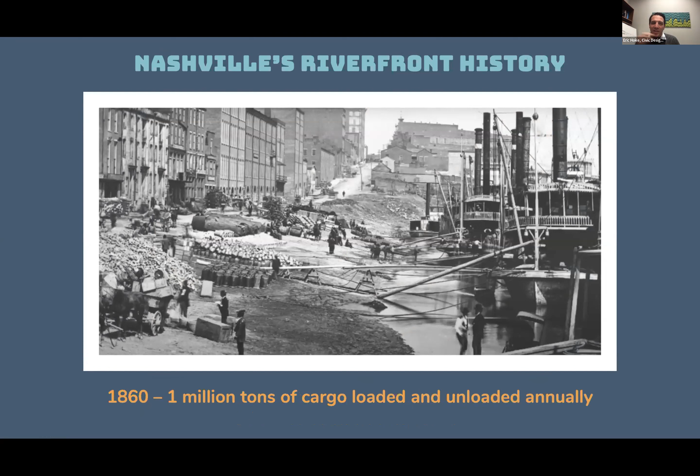By 1860, there was over 1 million tons of cargo loaded onto First Avenue there. This was a sign of utilizing the river, the active frontage, and the river was a really important part to the formation of Nashville as we know it.

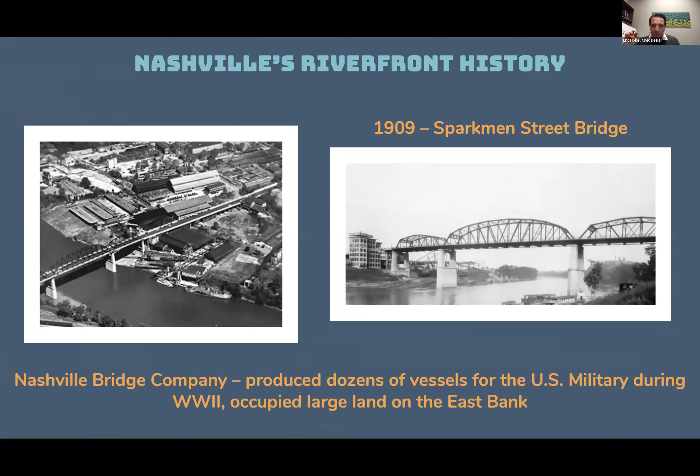Fast forward a few years to 1909, the Sparkman Street Bridge was formed, so it started to connect the east and west side. And the shipping industry really took over a lot of the East Bank there, where that started.

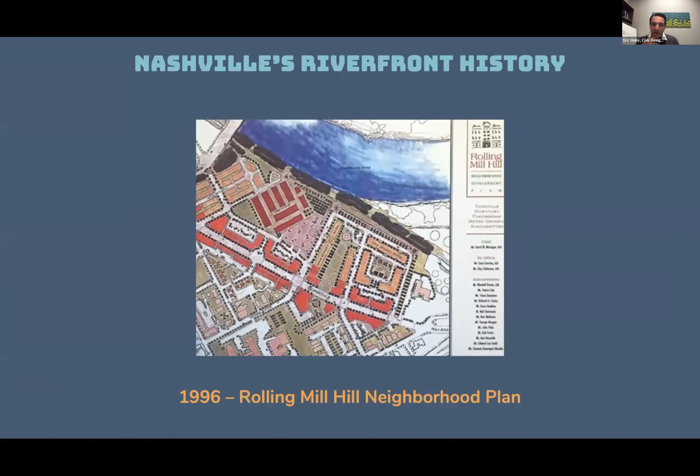Then fast forward again many years to 1996, when the Rolling Mill Hill neighborhood plan was formed, beginning to talk about residences in more downtown areas, especially as it relates to the Wharf Park area, just slightly north up the river from the Wharf Park site. This began to be formed as a neighborhood.

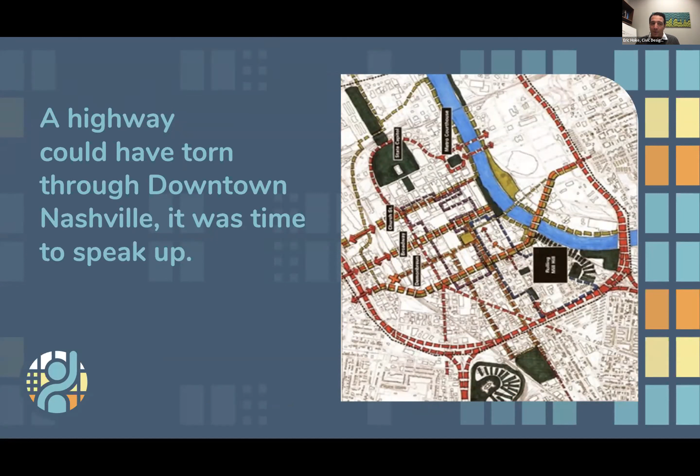So then in the 90s, there was a proposal to build an interstate through downtown Nashville, very close to the site where Wharf Park is, but basically where Korean Veterans Boulevard is now. This group, the Urban Design Forum, met regularly to discuss civic issues in Nashville.

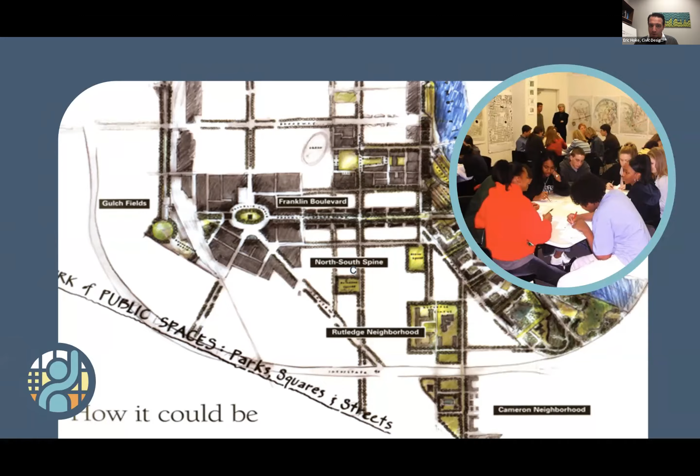They saw this as a threat to the development of the city as a whole, so they proposed an alternative vision known as the Franklin Boulevard, a more human scale design than an interstate, to suggest what the future of that corridor should look like. That effort went on to form the Civic Design Center.

From that moment, the Urban Design Forum decided we needed a more regular group, so they formed a 501c3 known as the Nashville Civic Design Center. The first project they took on was the Plan of Nashville, a document that still guides the work we do as an organization.

There are two principles I'll call out as part of that update: prioritize design that alleviates impact on the environment's natural resources, and expand the parks and greenway system.

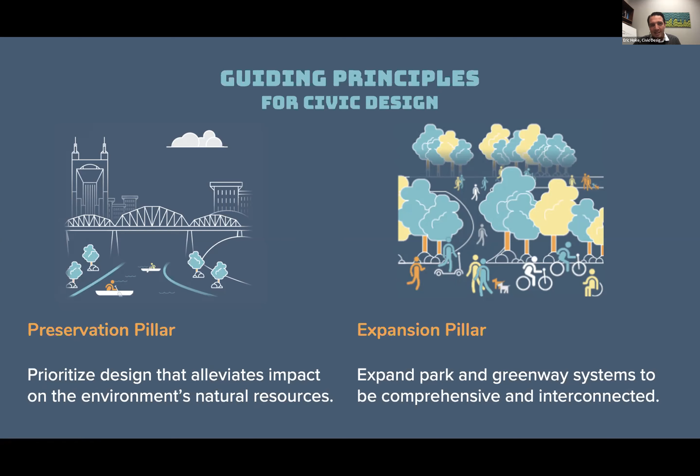I think these two principles are something we will think about as the Civic Design Center as we go forward. I'd really encourage you to go to our website and learn more about the principles.

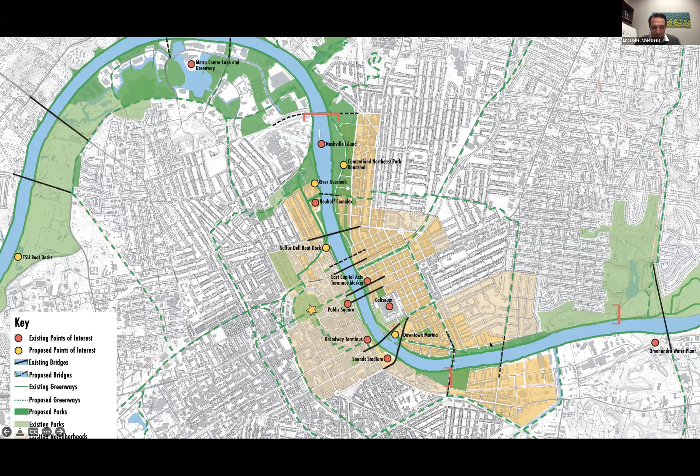This is an image from the Plan of Nashville, and it shows you again the site where Wharf Park is, at the bottom of the screen. That was called for even back in the early 2000s when the Plan of Nashville was being written.

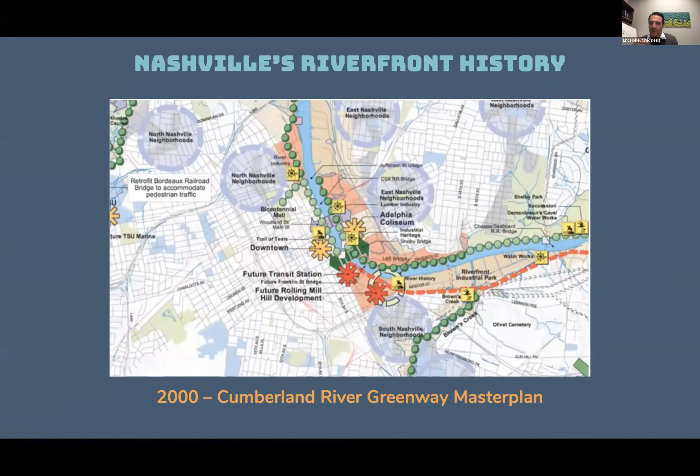Then in 1999, the Titans Stadium opens. In 2000, the Cumberland River Greenway Master Plan is published, again trying to make Nashville's connectivity to the riverfront a priority for the work we're doing. In 2007, the Hargreaves Riverfront Master Plan was completed.

Then in 2010, we had a very devastating flood downtown, which made us consider a lot of the issues that the river experiences.

Then in 2012, Cumberland Park on the East Bank, just across from our site, the Wharf Park site, was completed.

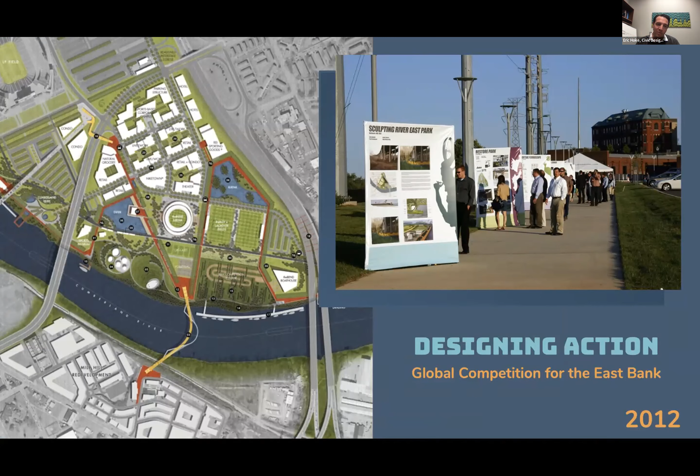Meanwhile, the Civic Design Center launched a global design competition called Designing Action, where we asked design teams from all around the world to weigh in on ideas for the East Bank in particular. The winning design showed a pretty interesting connection to the Wharf Park and Rolling Mill Hill area.

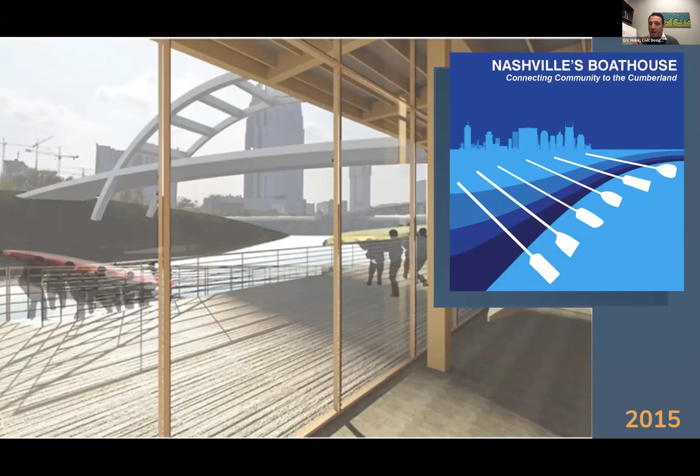Also in 2015, we worked with the University of Tennessee College of Architecture to envision boathouse ideas along the riverfront, which led to a design by Hastings Architecture that I think may be incorporated into the Wharf Park site. So pretty exciting stuff there.

Then in 2015, the Ascend opened, and in 2016 we launched another publication called Shaping Healthy Communities, which proposed a vision for the Blue Way, connecting several important sites along the Cumberland River, including Wharf Park.

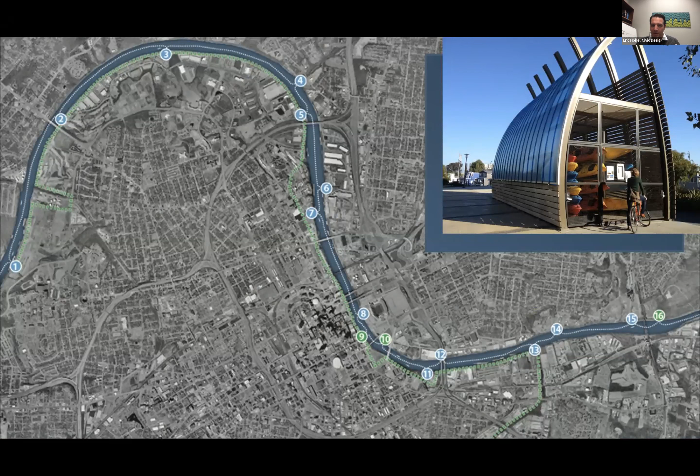We're currently working on a publication called Activating Waterways that will propose design interventions for some strategic locations along the river. That publication will be coming soon from the Civic Design Center.

I know that was a lot I just threw at you really quickly, but that's just a look at what we're working on now.

At this point, I want to turn it over to Tim from Parks to introduce this project. So take it away, Tim.

Thanks, Eric. I felt like my career, and probably a lot of the people on this call, our careers have just flashed before our very eyes with that quick history.

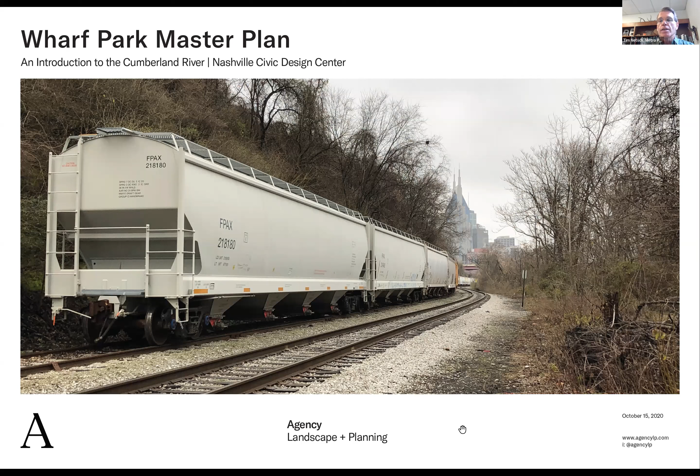As probably a lot of people on this call are keenly aware, there is an unprecedented amount of planning on and near the Cumberland River in the downtown corridor these days, and we're really in a period of transformative change. So today, we are thrilled to share with you some information about one such site, Wharf Park, and we hope it'll be entertaining, informative, and inspiring.

In a moment, I'm going to introduce you to Gina from the Agency Landscape and Planning team. About a year ago, the Metro Parks Department secured the services of Agency, out of Cambridge, Massachusetts, and their stellar team of planners to help us establish a vision and a future for the Wharf Park site. Gina Ford, Susanna Ross, and Kimberly Ware are here today, and in a moment I'll turn it over to them.

I have a tendency to feel like whatever park project I happen to be working on at any given moment is the coolest and the best. But it's totally true about Wharf Park. This is the coolest and the best project.

This aerial view gives you a little bit of site orientation as to where our site is. We've got about 25 acres with incredible character. So many of these other potential park redevelopment sites on the Cumberland River downtown are a little bit of a blank slate. And that's not true at Wharf Park. We've got River Bluff, we've got a quarry, we've got industrial relics, we've got a riparian forest. There's a ton of character, and that presents a ton of opportunities and a ton of challenges.

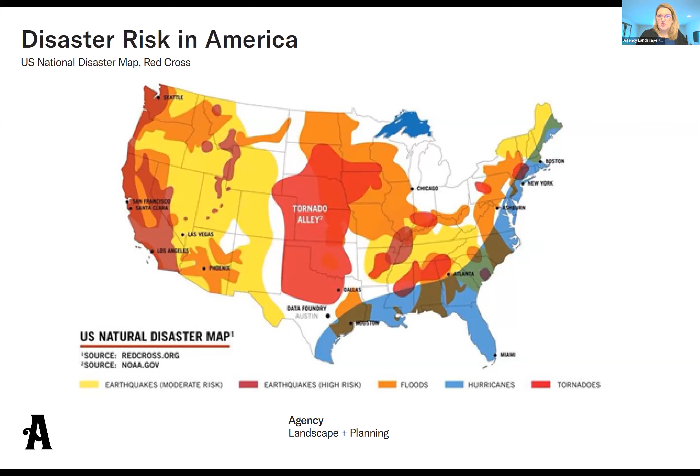So as we look at Tennessee, we know that's the case, that it must feel in many ways that you're accosted on all fronts. Thinking about how to help communities adapt to this incredibly disruptive environmental change is a big part of the way we think about the work. We knew going into this about the 2010 floods. I remember being here and interviewing for the flood resilience recovery planning after those events, and really being stunned at the amount of destruction of that flood, but also a lot of good planning that's gone into the works to make Nashville more resilient in the future.

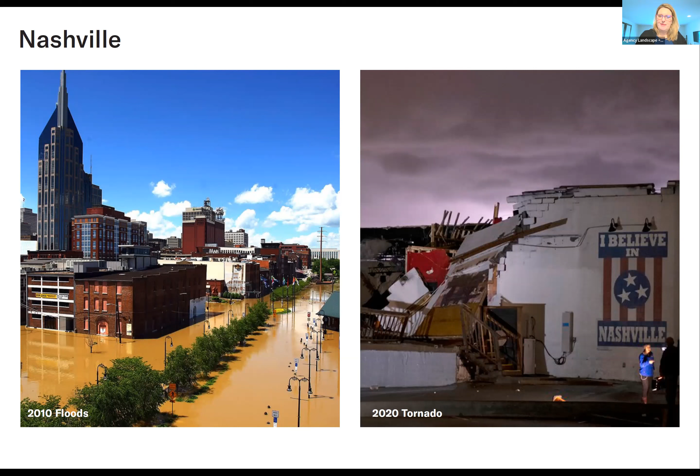And we had just kicked off Wharf Park, the Wharf Park master plan, when both the pandemic and the 2020 tornado hit Nashville. So the idea that these disruptive events are happening more frequently, and that they knock us down, figuring out how we can help communities brush off quicker and bounce back and be more resilient to them is critical.

So I wanted to share one example of this, of flood resilience, and this is at the Chicago Riverwalk, where I had the great pleasure of being the lead designer for the work on the Chicago River alongside Carol Ross Barney of Ross Barney Architects and myself as the design principal for Sasaki.

The great joy of this work was really 6 blocks of the main branch of the Chicago River. The idea was threading together these 6 blocks, linking together spaces that had been disconnected, creating a continuous public realm, and really thinking about how to reintroduce people to the Chicago River, which for many years they'd been held up and away from because of flood concerns and water quality issues.

Our scheme really centered on this idea that each block of this experience could be diverse, that it could offer diverse kinds of programs, and that each block could really be inspired by a specific water experience: the marina, the cove, the river theater, the water plaza, and the jetty.

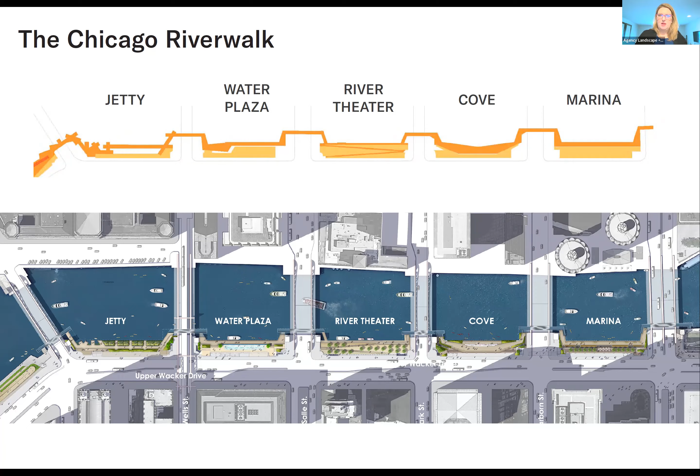This was the space we were given when we began the work in 2009, which, as you can see, was sad and derelict and non-continuous, even though Burnham famously had imagined this kind of continuous waterfront experience. The reality was very bleak.

Through many years of hard work and some great government funding, federal funding, we were able to transform that space into this continuous public realm with different kinds of spaces along it.

In this case, a kind of dining terrace that allows for people and boats to interact in a really direct way. And importantly, before, people were held up and above and away from the water, and a lot of our work was getting people down close to the water and really welcoming that exchange with the water sheet.

These different experiences, from those of dining to those of human-powered craft, which are welcome to the cove, to the casual connectivity moments of people strolling along the waterfront, are all part of this dynamic, multi-roomed experience of the river.

Really important to this conversation, welcoming people to get closer to the river meant also welcoming the flood dynamic into those spaces. So every single one of the spaces along the Chicago Riverwalk is designed to receive those flood waters, to be dynamic.

In this case, the jetty was a whole room dedicated to floating wetlands and fish habitat. Those floating wetlands actually sit on the water surface and rise and fall with the dynamics of the Chicago River. It's a way of registering to the community those dynamics, as well as making it a beautiful experience.

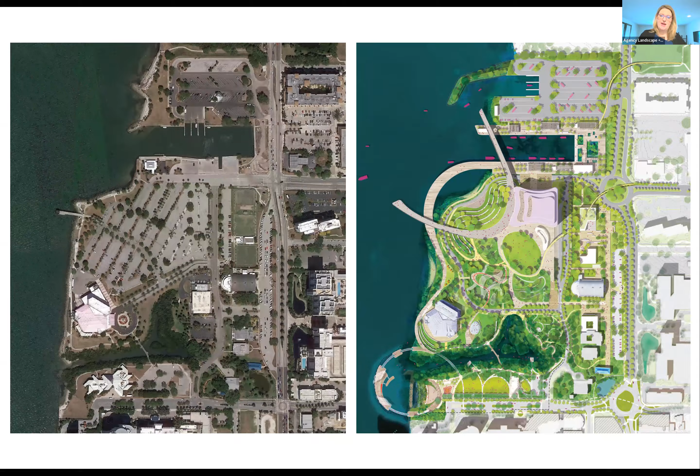We're really happy to say that even though that master plan wrapped up in 2018, we're now in the process of realizing the first 2 phases of construction. Phase 1 is under construction - that's this view you see here, a 10-acre community park on the south side of the site. We're mobilized to deliver the rest of the majority of the site over the next couple of years.

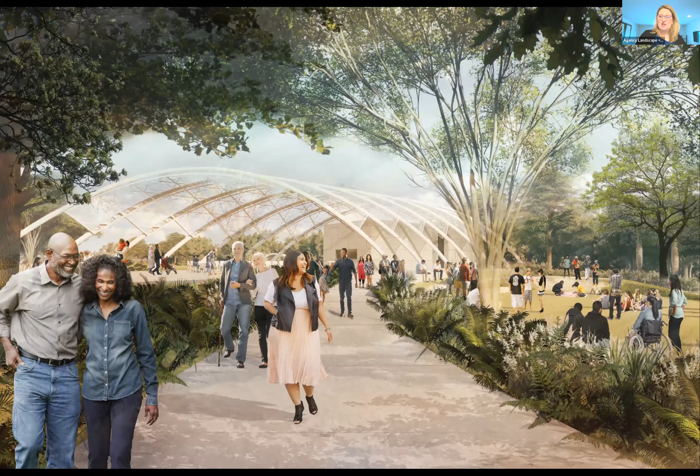So master plans can lead to quick action if there's momentum and enthusiasm, which there was here. Again, it was really about having that great public access on the waterfront, but also making sure it's amenitized to give people reasons to come back again and again, whether through cafe and food offerings or performance and programming, as this image starts to suggest.

We know, and Eric just did a brilliant job of the much bigger overview of the parks, but we know that we're working alongside and have had lots of conversation with the work on the East Bank. So understanding that Nashville's change on the riverfront is much bigger than what's just happening at Wharf Park. There's so much happening, and we know that change is going to be felt soon, and it's going to be a really interesting time for the city.

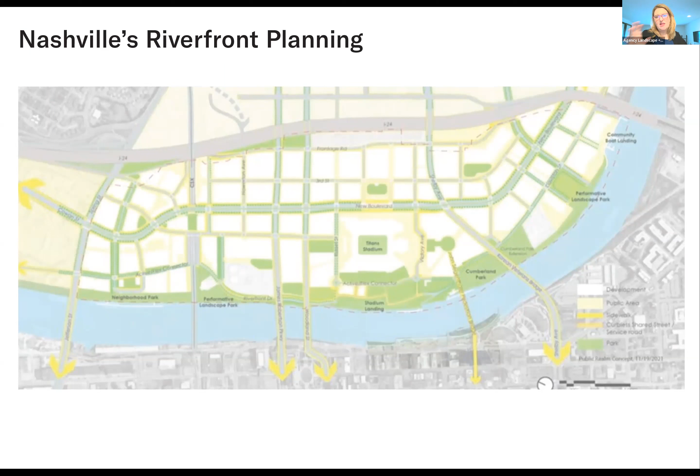So thinking about how to make sure all of these plans are coordinated and that all of these different efforts lead to that diversity of experience, and really making sure those spaces meet the needs of the community, was also a critical issue at a recent plan we conducted called the White River Vision Plan. This was a strategic, higher level plan looking at 58 miles of the White River in Indianapolis and Hamilton County, a very urban county and a very rural county that came together around the resource of the White River. There, again, 13,000 voices participated.

It was an intense process of getting out and making sure we listened to the bluest of the blue voices and the reddest of the red voices, and came to a vision that everyone could agree on or could live with and be happy with. So in this instance, 58 miles, as you think about your whole riverfront, allowed for there to be those distinctly urban experiences of highly developed recreational spaces and connectivity, as is envisioned here with the downtown Indianapolis view.

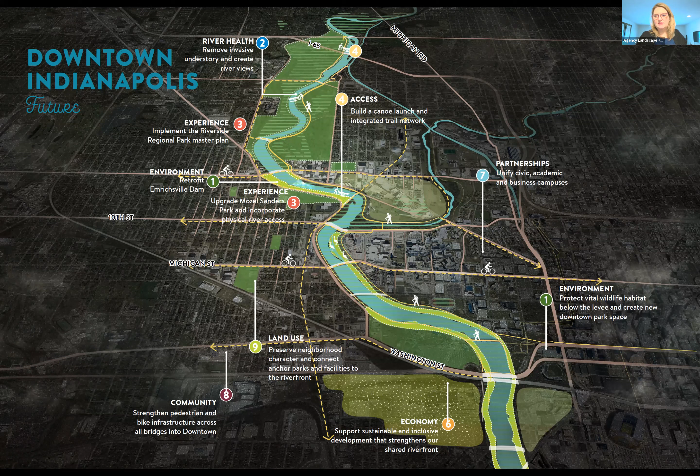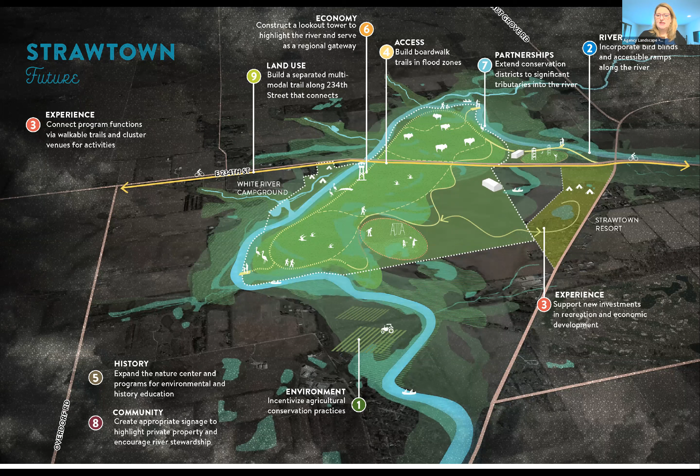So you see a real emphasis on connectivity, greenways, activation and experience, and also partnerships in these more urban reaches, really imagining places that could be community hubs, bringing people together by the river's edge and really celebrating the life on the water's edge, as we call it, but also making sure there were really distinct places for environmental quiet and intimacy, such as at this northern reach called Strawtown Koteewi, which was an existing park we really wanted to see enhanced to include more activation and association with the river.

And so in this instance, it was really about those quieter uses, those kind of recreational uses that were a little bit more intimate in scale, and a whole series of environmental restoration to make it a healthy and green environment. So with that, I'm going to now pivot to the team and talk more specifically about the work underway at Wharf Park, but just wanted to give you the context of the work we've done in the past and some of the issues we think about.

And that is the experience that we have brought to bear as we have had the great pleasure of working on Wharf Park. I'll turn it over now to Susanna.

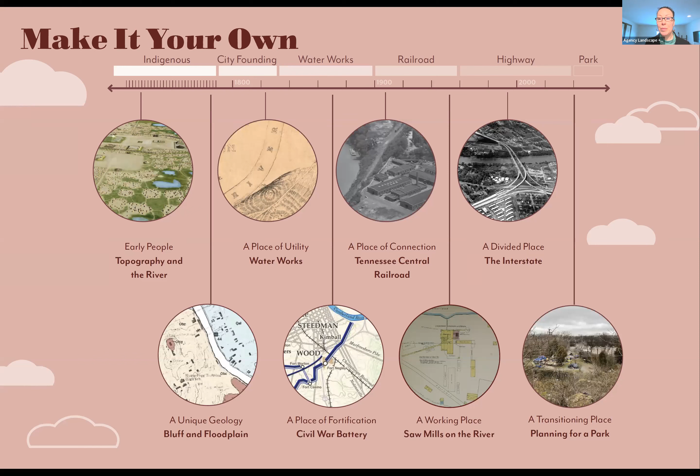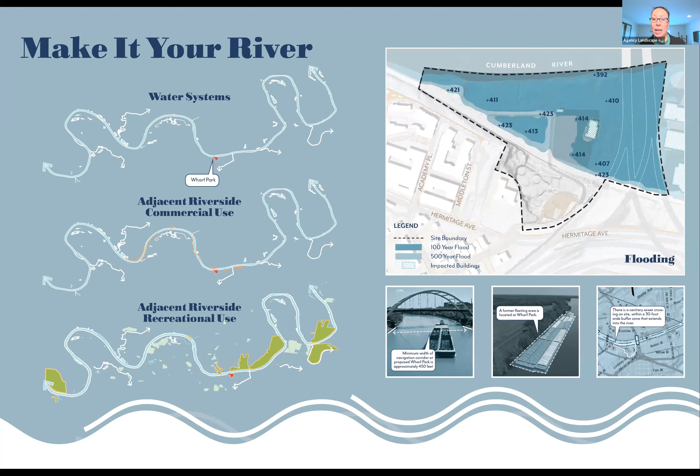It's also, as the map on the upper right shows, a place that floods. It's a floodplain. We know at the 100-year and 500-year flood elevations that we can expect to see flooding, so our design will have to factor in what can withstand inundation and what can't.

Next, looking at parks and where this fits within the context, we expect this will be a neighborhood park. The neighborhoods we are serving, we expect, will be from across Nashville, but particularly those closest as the crow flies. Rolling Mill Hill sits right at the top of that bluff looking down at the park.

Napier-Sudekum is separated by the highway, but we've got a pedestrian overpass that we think can provide a great link to this park and make it a real resource for the Napier-Sudekum community that they don't currently have. We want to enhance that connection, figure out how to make it better and a more practical place for people to go on a regular basis.

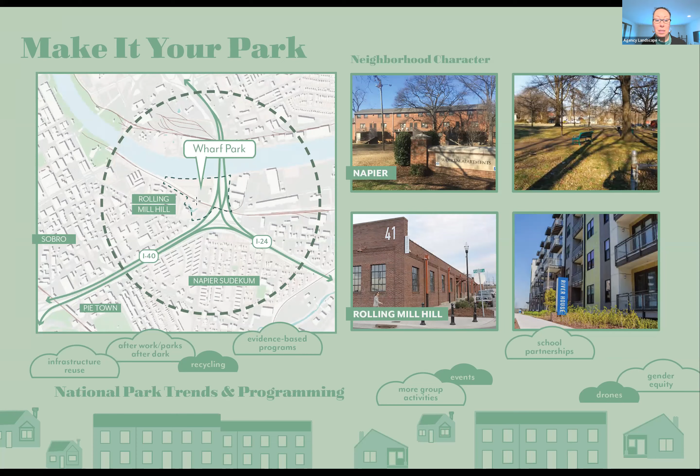Then the Greenway lens: there's an amazing network of both existing and planned connections within the greater Nashville Greenway, and it's lovely that Wharf Park falls smack in the middle of all of it. While at the moment this site is fairly inaccessible, we know going forward people will want to get there by foot, bike, bus, and car.

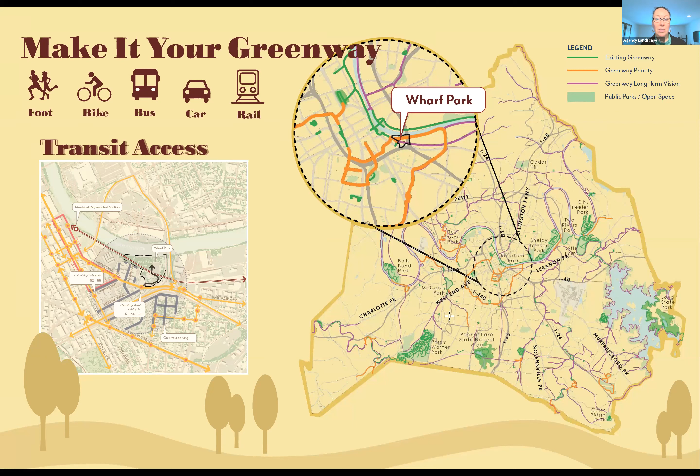So our plan is thinking through that in a lot of different ways. You'll see many different ways of looping into the site as we get to the schemes we're going to show you today. With that, I'm pleased to hand it over to Kimberly, who will talk about the outreach we've done to date and what we heard that helped shape our options.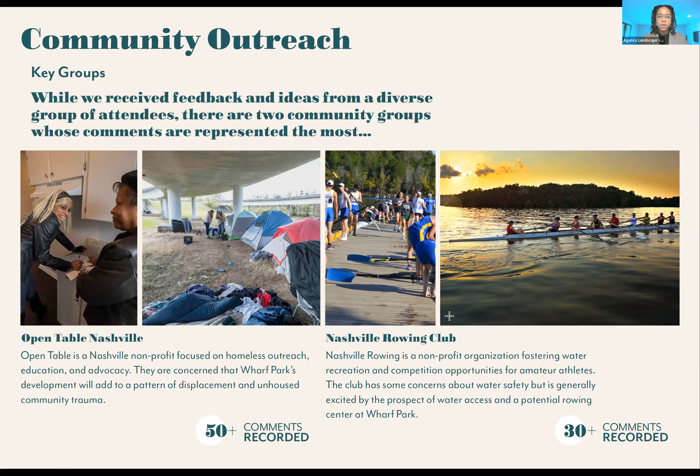So those were the two main constituents that we saw at the last meeting, and we were seeing a little bit more of that this week. We just had our first meeting showing the design options yesterday, and both of these communities were present as well, but we welcome the whole community to give their feedback.

So just a summary of what we talked about. We set up the engagement stations in the same way that Susanna was just mentioning, with the identity, river, and greenway, and getting people's comments based on those key areas.

In terms of what people wanted to see for the identity of the park, it really centered around having a space for youth recreation. We know we want this to be a neighborhood park where kids can go after school, and have a place to spend their time with access to outdoor, open space and greenery, a place to go outside of their home. So future access from those neighborhoods close by Napier, and concerns about the social welfare of the currently unhoused people on site, is a main concern with the identity of the park in the future.

In terms of river access, we had a lot of rowers come out, so they were definitely interested in having dedicated space for human-powered watercraft, paddle watercraft, etc. We know we want a diversity of water uses there, including kayaks and paddle boards, as well as rowing. Water safety, considering this is also a commercial waterfront, was important to people, and passive river viewing as well, not necessarily always getting into the water, but having a space to just take in the vistas and potentially look towards downtown from this site.

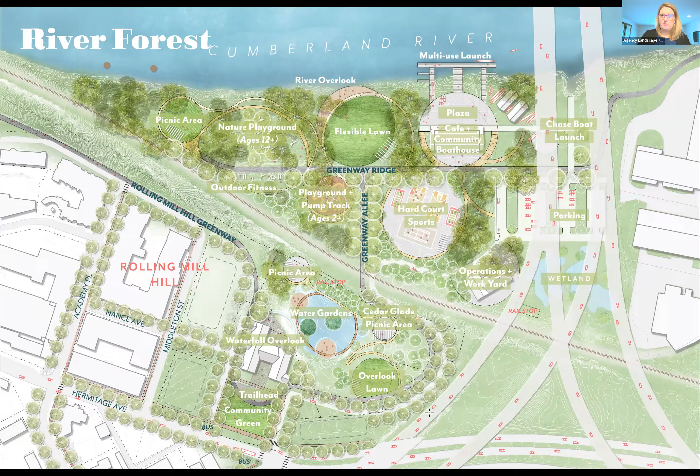To walk through some of the really special parts of this scheme: first, the circulation systems. As you can see, it's continuous with the Greenway, really snaking through and becoming part of that ridgeline system I described, with a secondary circuit that moves you through all of those clearings—working to preserve as much forest as possible, but then thinking about how to plant and supplement that to create great spaces within the park.

Across the bottom you can see where character and program start distributing—pockets of spaces with different recreational uses, potentially play spaces, court spaces, and more passive lawn spaces. The views of the forest and through the forest out to the river become the character-defining pieces, as well as that bluff, which we are smitten with. You'll see 3 different ways we approached it—an idea we're really excited about.

The quarry as this upper landscape of rough-hewn terraces made through industry, with traces of old foundations from the tanks that were there previously. As you can see with these circles, we wanted to make a scheme that really honored that trace.

We used that as a layer for an industrial water garden that could even have a water overlook, where water could spill from that upper School for the Blind down—whether it was stormwater or recirculating water—something that really celebrated the presence of water, and potentially even brought some of the native cedar glade landscape of Tennessee into this space because of its rocky, craggy identity and character.

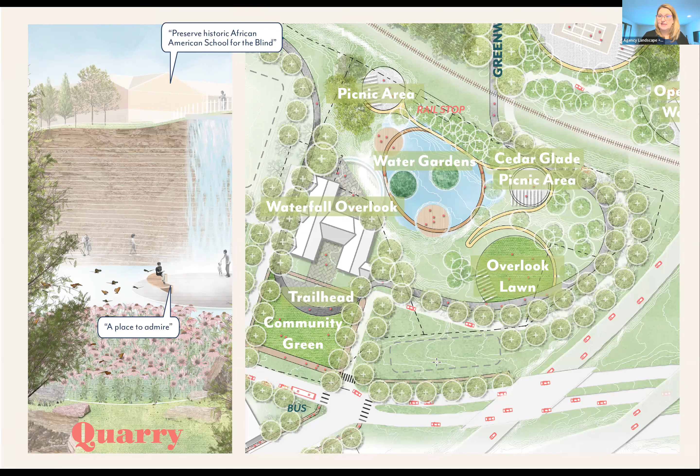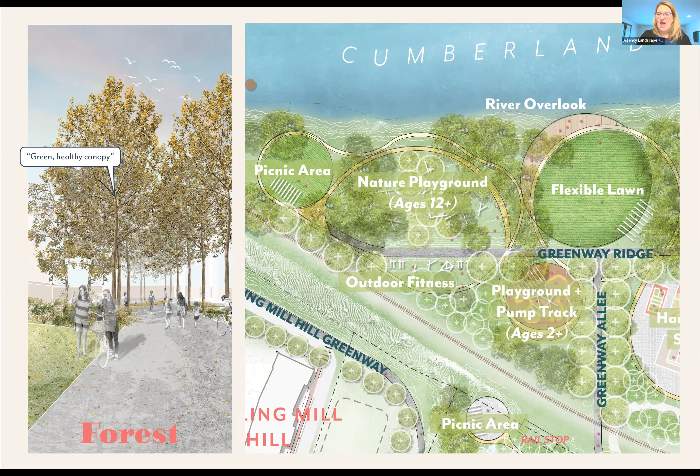We imagined also in the lower floodplain, we're going to move through each of these zones with you for the 3 schemes. In this scheme, the forest would really be the celebrity and the Greenway Ridge line would become this unifying promenade framed on both sides by trees, a kind of formal allée that brought you through the forest and opened up views into pockets of places and spaces: a picnic area, playgrounds nestled in the forest, a playground and pump track for tots, a wonderland for kids just learning how to walk, and a flexible lawn space that perches right over the river's edge.

And then lastly, in each scheme, we've been working with our partners at Hastings Architecture, as well as the rowers, to think about where and how this community boathouse becomes an anchor on this site. Here it's adjacent to the Silliman Evans Bridge, taking advantage of the underbridge for some distributed parking, with driving access down and parking under the bridge connected to that Greenway Ridge system. This plaza and community boathouse operates on two levels: the upper level addressing the Greenway Ridge, and the lower level addressing the river with some limited boat storage and a floodable lower level. We imagine a multi-use launch that really enables the boathouse and novice rowers to get familiar with the Cumberland.

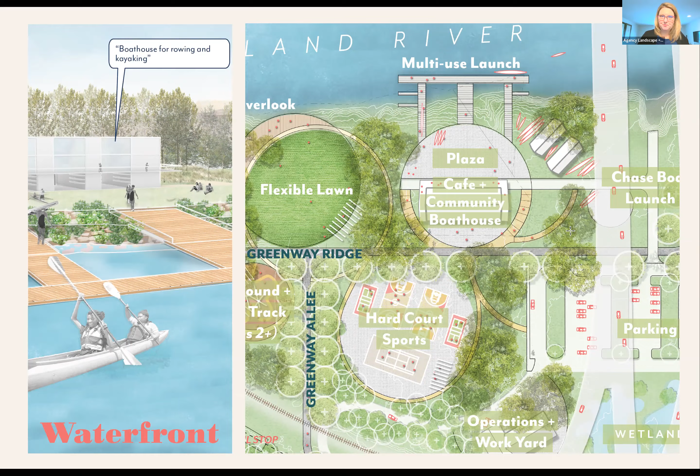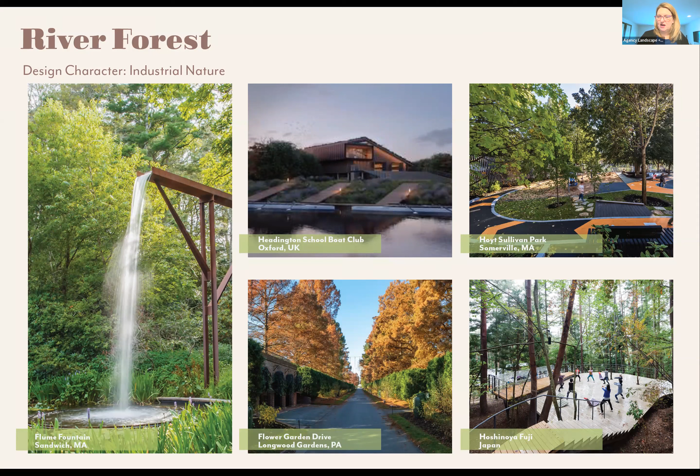Just a few of the precedent images: this flume fountain by Stimson Associates is one of the most lovely examples of this kind of water drop, and we could imagine something like that happening in the quarry, really celebrating that verticality. And then some other examples of these kinds of recreational spaces that really take advantage of their woodland context for character.

Our second scheme here, Bridge and Bowl, is really an iconic neighborhood park that creates two central moments. The bowl here becomes this large community lawn that's flexible for field sports or just a space for community events, a place for people to come and relax and see and be seen, on the riverfront.

On the opposite end, we wanted to activate the narrower side of our site, because there's a fantastic connection to Academy Place, directly adjacent to the pedestrian bridge that connects over to Napier-Sudekum, the community we're trying to focus on for this park access. From that Academy Place connection, we wanted to create an iconic bridge moment, an icon that can be seen from within the park, but also outside of the park from downtown.

This allows people to snake down onto the western edge of the site, where we've created this Boathouse riverfront access campus. There we do a bit of riverbank manipulation to create a small safe harbor for people of all experience levels and all different types of human-powered watercraft to launch from, a moment of safety before they go out into the main stem of the river.

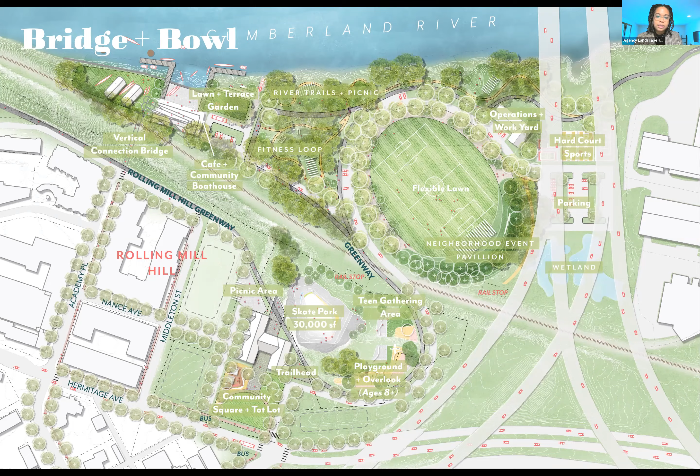With the bridge and bowl options, our main circulation stem is this beautiful S-curve that we really love, continuing the Greenway down through the park before it goes to the east, and the main vehicular transportation follows that access as well. For the environment, we wanted to preserve again as much of the forest as possible, but in this one we have a bit more planting to create a more formal park experience, framing views and the such.

As far as the character of the site, the two main moments we wanted to highlight were this large oval lawn for the community, which can be graded to have views towards downtown and towards the river, becoming a really spectacular moment, as well as the bridge to the waterfront, where you also have views all over from the park.

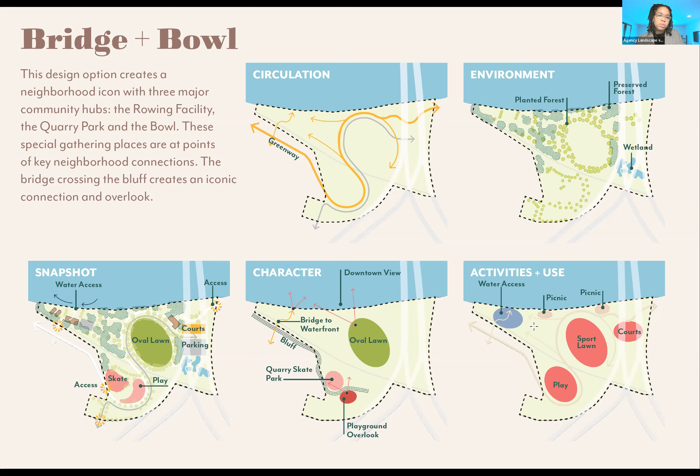And so the activities and uses—the more active uses are clustered in the quarry, the sport lawn that can be flexible, and the courts underneath the bridge. And between that, you have these more passive picnic spaces and trails where people can have a quiet moment to experience the existing forest on site.

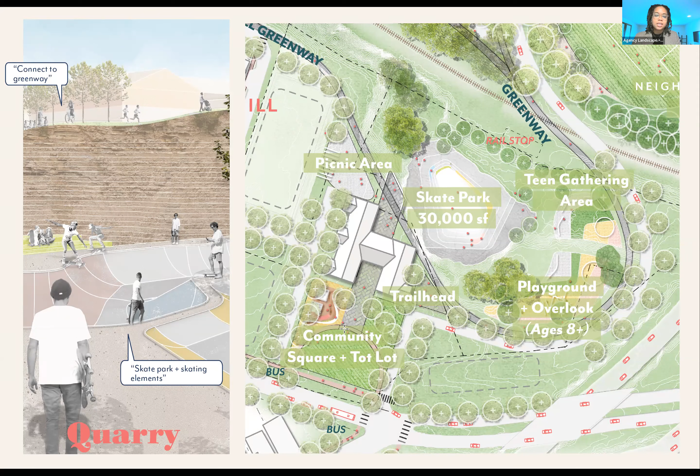And here in the quarry is where we're creating that larger regional skate park. It's about 30,000 square feet, creating a really cool backdrop with the quarry wall, having some bowls and street skating opportunities for people to enjoy that amenity, but also other play areas for people of other ages and ability levels.

And then for the bowl, there's this larger flexible lawn that can be used for field sports, but also can just be a nice place to rest and relax and enjoy this open space for the community, as well as this ring around the bowl that can be used for picnic areas or seating opportunities to look into the lawn, having various experiences within the center of the park.

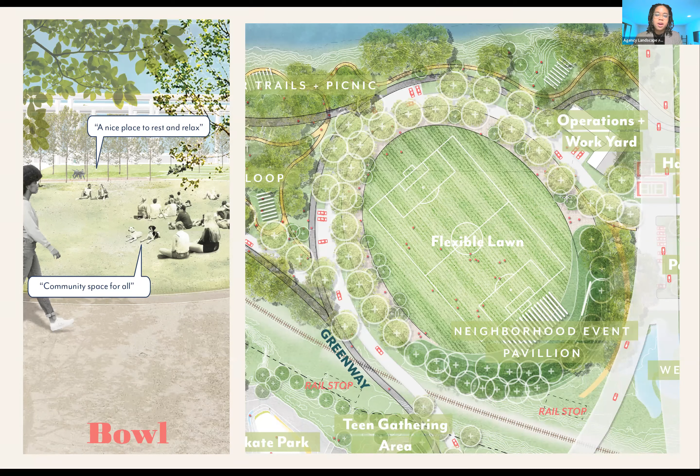And then here with the boathouse, there's this ambitious bridge that kind of snakes down from the top of the bluff into the boathouse area that, as Gina said, is a two-level approach—the upper level more for the community, events and training, whereas the lower level is more for boat storage and is floodable for that purpose as well.

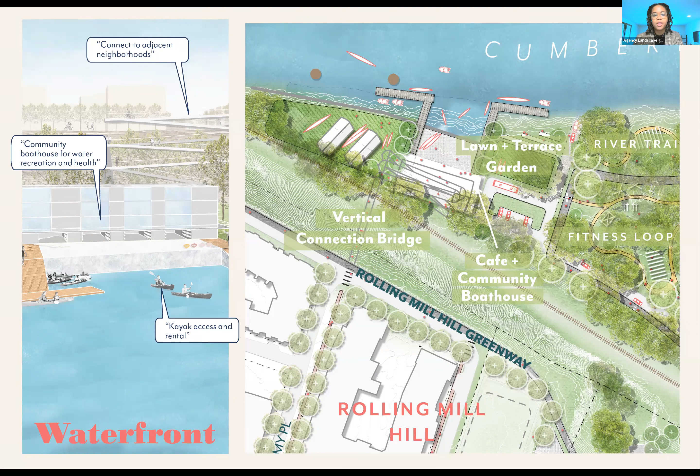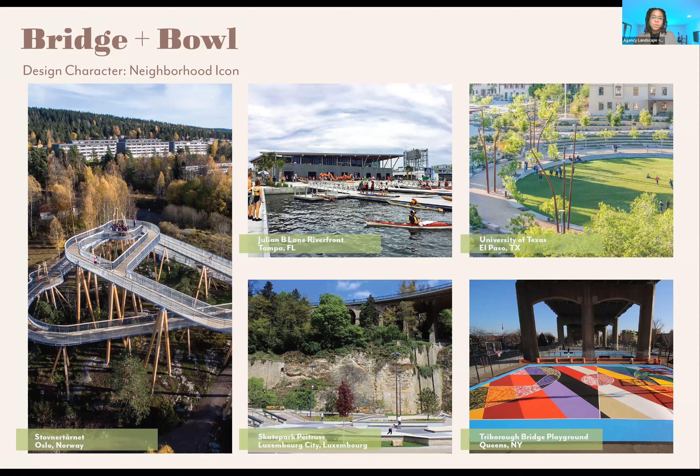And here's just some precedent images we were thinking about for the character of this site—this really iconic bridge that we love, that the community really liked last night, visible from all areas of the city and the park, while also having this interesting skate park experience and colorful courts underneath the bridge.

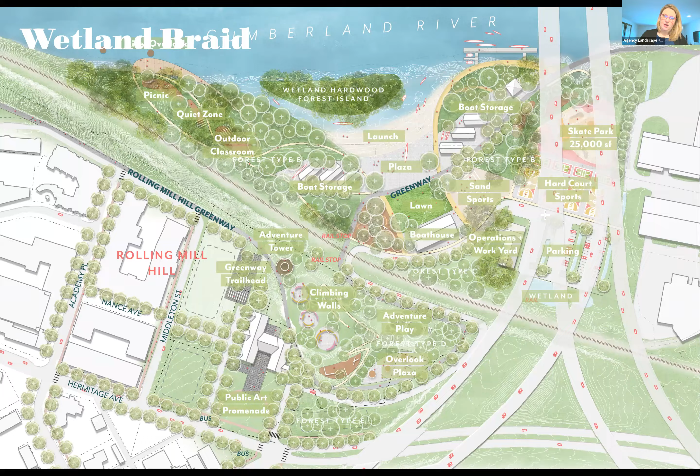So as always, the Greenway becomes this unifying circulation. The road comes off of Hermitage down through the site into the parking beneath the bridge, with secondary paths and nature trails outside of that main formal spine.

We love this notion of a layered planting experience, moving from the more riparian wetland edge to the riparian forest to the upland forest, experienced as a transect across the site. And as mentioned, the formal activities really happen at the center and in those pockets of the underbridge and the quarry landscape, leaving a majority of the site for more natural experiences.

And then just really thinking about the ability to frame views through these different layers of forest out to the waterfront as being really key to the identity of this scheme.

Here, we imagine taking advantage of that vertical grade change as a kind of fitness extreme sport element. So maybe there's some standing climbing walls that mirror the quarry walls. The quarry walls are too soft themselves to be climbed on, but we could make it a kind of backdrop to that activity, with more architecturalized vertical circulation built in, with overlooks and adventure towers.

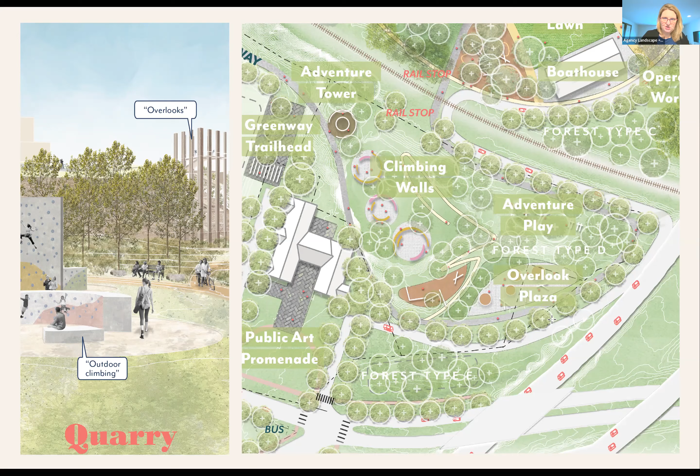And that's nestled into this space of other adventure play amenities, as well as places to just sit and relax within the landscape. This central defining feature of the carved out water course becomes that central spine of public gathering and higher impact to the site, with potential boat storage framing that space, really letting that water access be the central identity giver and centerpiece of this park, but having it also have some smaller amenities built into it to make it really a campus.

I love that description of it in the previous scheme.

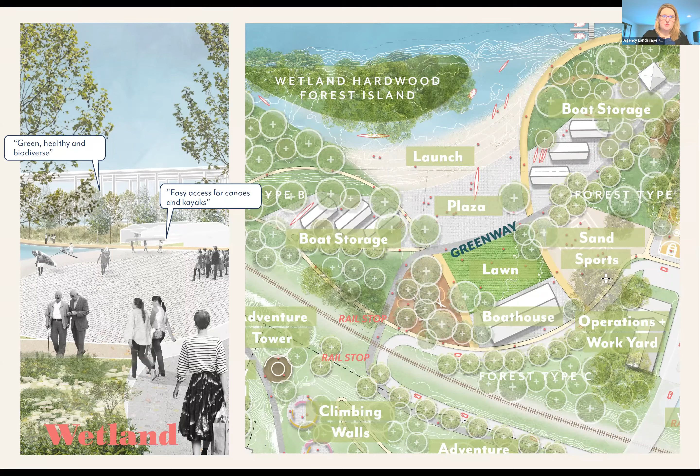And then beyond that centralized part of the site, really looking to create quiet, lovely spaces within the forest that allow you to have access to the river, but maybe more intimacy, bird watching, quiet space, maybe resting in the forest, with much smaller pockets of experience as you move through that more remote western edge of the site.

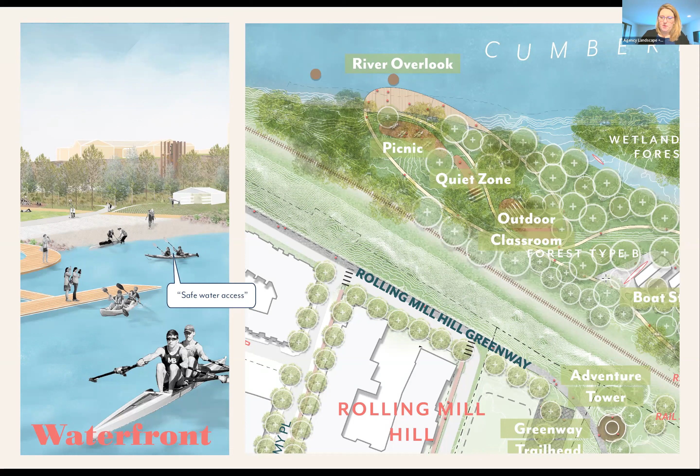And just some examples of this idea: even though this scheme is more disruptive, I think, to the existing forest than some of the other schemes, it does introduce a whole series of wetland and native plant habitats that could be quite interesting as a park setting, and has this layer of experience and adventure that we think could be quite exciting when brought together with this kind of natural identity.

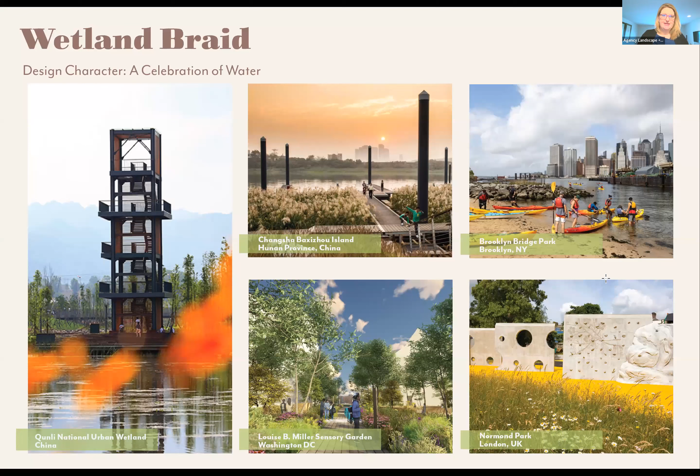And so that's it, those are the three schemes after much toil and love. These are where we stand. We're here over this 5-day engagement, really listening to the community about what is desired, what's resonating, what's disliked, and we've heard a whole range so far. We don't have any tallies to share with you just yet.

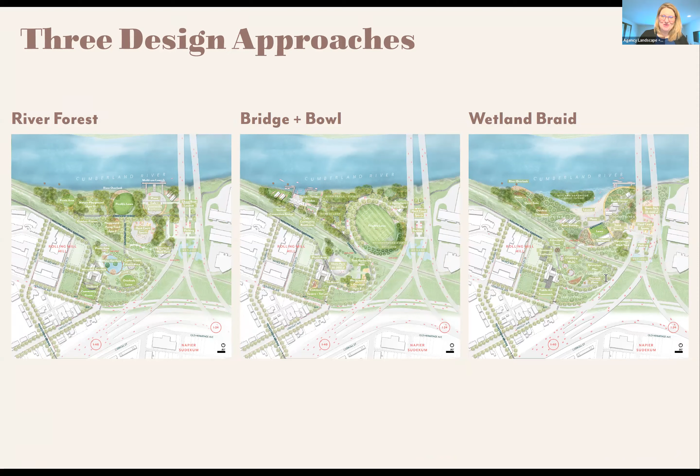For the community, we have these models that show the topography and sort of game boards for folks to give us input, but we also gave this quick evaluation matrix just to show the community the different acreages of different amenities versus level of impact, passive versus active, really just wanting to give some metrics to support the distinctions between the schemes to help aid in evaluation.

And we provided, as part of that work, a scorecard that both summarizes the work, but also gives the community an option to weigh in on the schemes through the lens of the principles we established early in the process: connectivity, character, environmental health, and activity and use.